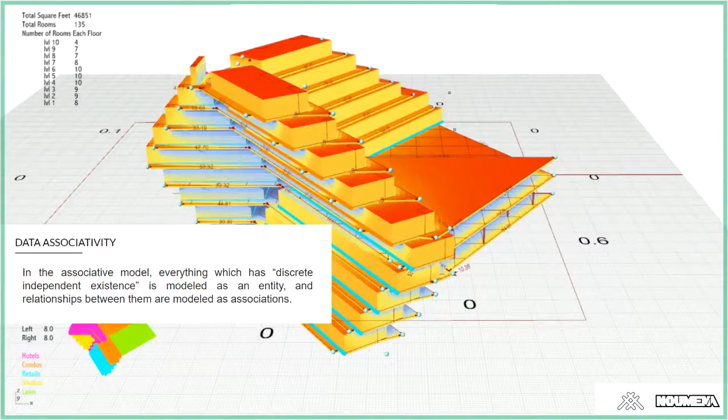Computational design, for what it represents, maybe integrates even a step more. So which are the parameters that are really affecting the design protocol? For sure, we are talking about parameters, as Anastasia said before, parametric design. One thing is parametric design, another thing is computational design - this is a small difference. Parametric design is the iteration of forms that are defined by a series of parameters, numbers that control their shape.

Computational design is a process that is built on top of parametric design, but where the intelligence and the complexity is established by a series of external forces that are integrating a higher sense of logic in the definition of a new aesthetic. In human sense, this means we are starting to design with external input. They are not only directly affecting design itself, but are related to the design implication - for instance environmental solution, structural analysis, etc. All these material characteristics, all these parameters become design parameters.

Thanks to the data associativity, so the capacity to associate those inputs into a series of information that affect forms and geometries. But how can we inform these geometries, this aesthetic? Which are the protocols, the different criteria that we introduce in order to establish a workflow of computational design?

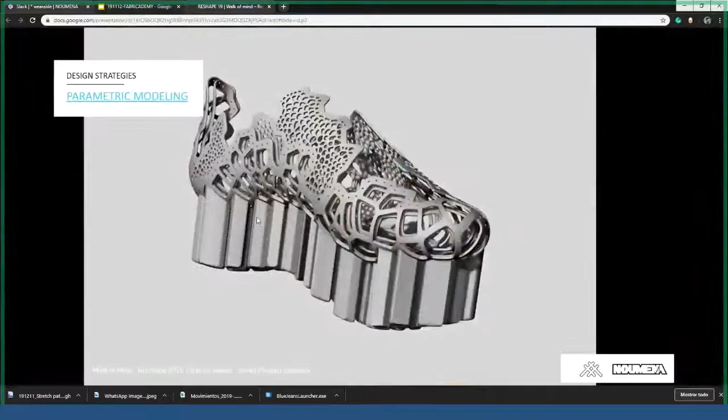Another different approach that we can find in computational design actually represents a different negotiation between the designer and the machine. In this case, we enter a protocol where it's not really possible to define the characteristics of the output, and we establish with the machine a co-creation process that relies on the participation of both agencies - the human one and the machinic one.

So if you talk about loops and recursivity, this also is a definition. This presentation is shared with all of you, if I am not wrong. You will see this is a very typical - I guess the video is not working here, we will fix it - but this is a typical process where the aesthetic output is actually the result of a repetition of a series of actions over time through a number of iterations, and these iterations are actually modifying and transforming forms and geometry.

So here you can talk about fractals and all the iterative design that is connected to loops, cellular automata, L-systems, etc. It's completely a different world.

Then also talking about emergent design, we have the huge sector of agent-based design. In this case, we are talking about the definition not only of actions, but actually the definition of behaviors. So what we are programming are actually agents that have their own intelligence, their own sensibility between their movement and the environment, and are starting to move freely in this space, but what the designer is producing is the set of rules that they need to follow for every movement.

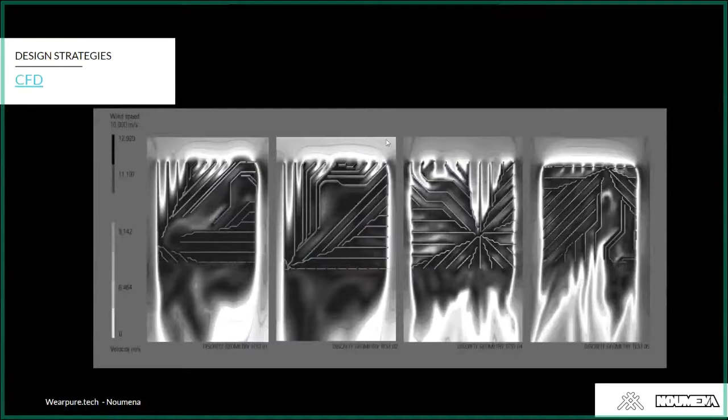Okay, so grazie. So what I was mentioning here with computational fluid dynamics is what is happening in the car industry to simulate wind. Can you hear me, Teshi?

I see you. Okay, all good. Audio is perfect here. Okay, super, I'm happy about it. So okay, I will show you later this project.

Okay, I'm sharing the screen, but I don't want... Okay, I can move it around. So I will show you later what this is related to.

We will jump into the specific process. But it's exactly what in the car industry you do with the wind tunnel. They are simulating the movement of air and understanding which is the best, most performative shape that can produce the faster car. And we will see how we can introduce something like this also in the making of new textile applications.

Then talking about textiles, there is also the possibility to simulate textile behavior. In previous Fabricademy classes we've also been through these protocols that you might be a little bit more familiar with. Commercial softwares like Clo3D, for instance, are integrating simulation of clothes and fabrics into digital environments.

But in this case, it's very similar and connected to the integration of physical behavior into the digital environment. This is also what we are implementing, or we implemented, I will show you later, into the production of new aesthetic solutions. We will jump into it and I will show you how.

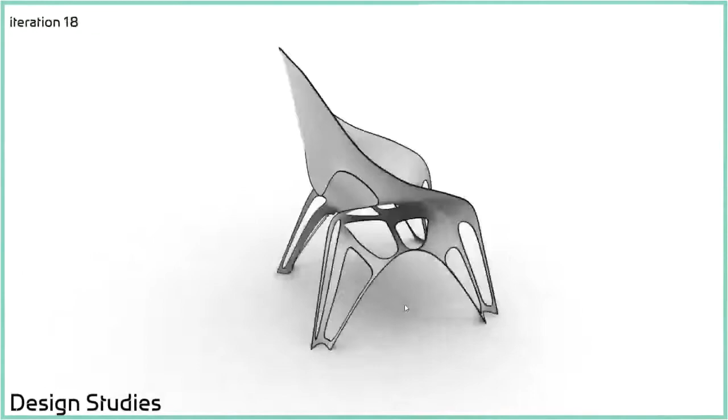In this case you can see the simulation of the chair itself, the smooth form of this chair brought into a higher level of tessellation, and then what is run on top of this structural geometry is a mesh topology optimization.

So according to the weight of this person, you consider weight loads, then support systems, and you start to understand how the material should appear or disappear, should be integrated most in some specific areas in order to be more structurally performative.

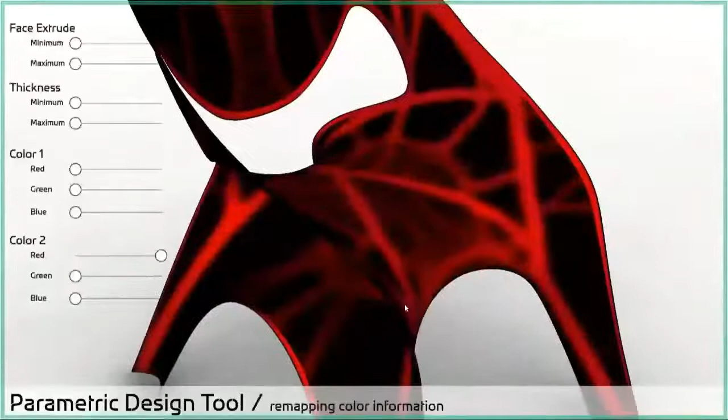But the interesting part is that all these instructions and protocols are associated, from the digital realm, to the definition of G-codes, so machining protocol for fabrication. And this is also something that is not new at all.

In the Master of Robotics and Advanced Construction, we also did a second iteration on top of this one, and I invite you also to have a look at the final result.

It's still very valuable as research, even though we're talking about something from 2016. In computational design, things become outdated very quickly.

Talking about what I said before, these different protocols or negotiations between machine and designers. There's the big realm of machine learning, convolutional neural networks, and the definition of new integration of machine decisions into the design realm.

Grasshopper, in 2011 if I'm not wrong, introduced new systems for evolutionary solvers. This was really the beginning of protocols for machine learning based on the definition of goals and parameters, genomes that could support the implementation of the best, most performative solution according to a series of characteristics that the designer was setting up.

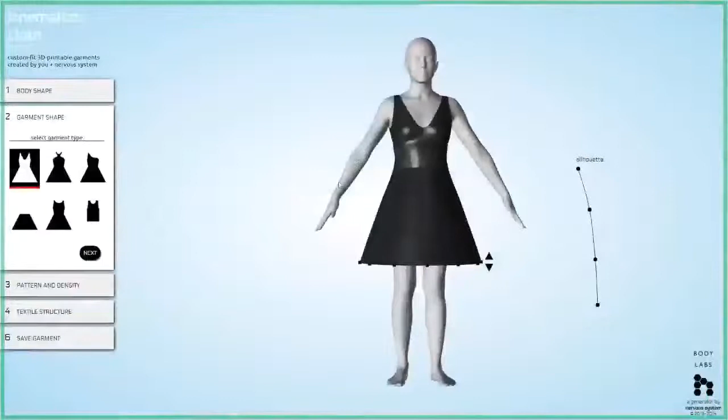So: control geometry, forms, tessellations, and associated to this capacity to produce variety also the possibility to customize the shape, customize also the connection between body and geometries, and control at the same time all the fabrication protocol.

This is a small exercise that we will also do in our class today—an iterative tessellation that is controlled by just the definition of these different colors. This iterative tessellation, at the end, is also controlling the definition of this new skin that they are producing, a skin that is of course 3D printed, and this is the final output.

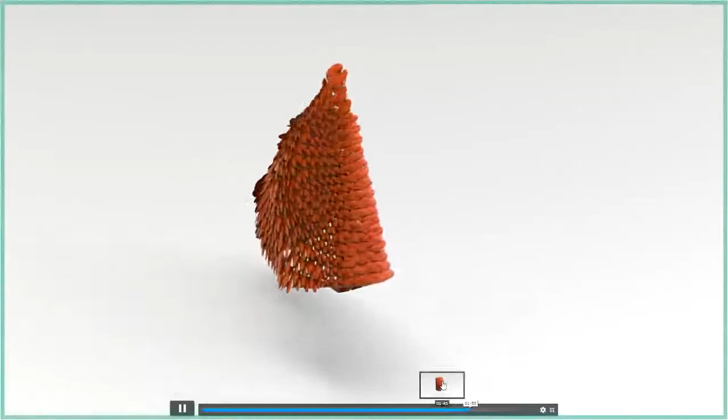But of course, nothing is so simple. In order to fabricate this piece, you need to combine the different characteristics that even the machine has. So the interesting part in terms of computation that nervous system did here was to unfold the dress and understand how the dress could be folded in the minimal amount of space to enter the machine.

As you can see here, the printing was rolled in order to be implemented inside, fit into the machine space, and then fabricated. So an interesting connection between variety algorithms that are controlling aesthetics, definition of fabrication protocol, and also controlling this fabrication protocol according to the machine characteristics—which is great.

And then jumping a little bit to this project—let's go on. Of course computational design is implemented as well in interior design as another field, and here we are introducing a lot of different aesthetics, some of the furniture that we introduce, or also implementing different paradigms for artistic installations.

For instance, here we have a code that has been implemented a lot also in computational design and in fashion design as well, you will see it. For instance, me and Cecilia have been working on a similar code for the definition of Coralia in 2017, a dress that was mimicking a coral reef, associated with this computational code.

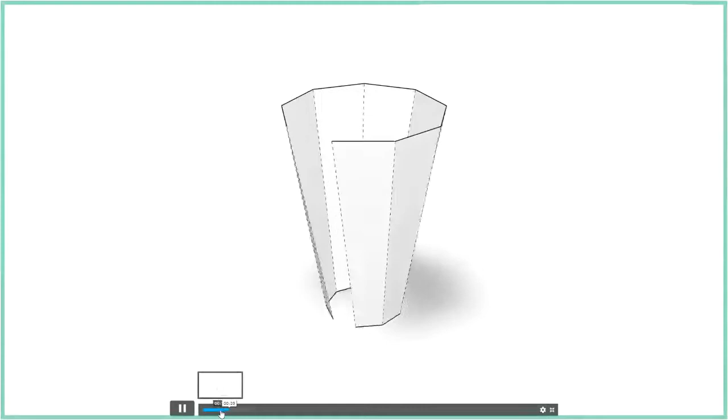Also, of course, instructions for 3D printing—this is a project between Zaha Hadid and AI Build.

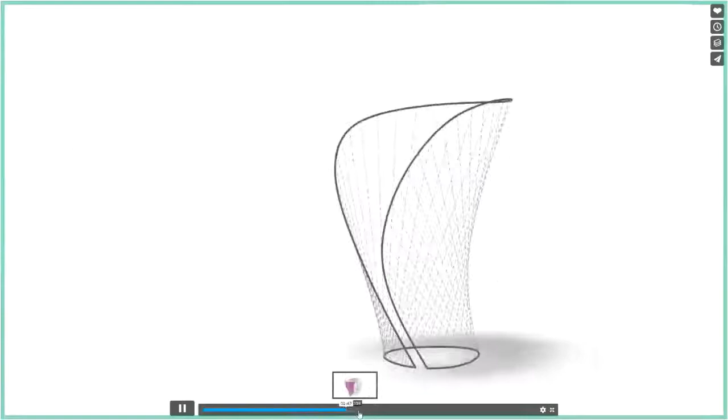The interesting part here is also the integration, as usual, of machining protocol and design iterations. So this is the shape, defined by a specific fabrication process called ruled geometries. All these strips are actually planar systems, then defined by a machine cutting according to these planes, like here, by a 6-axis robot.

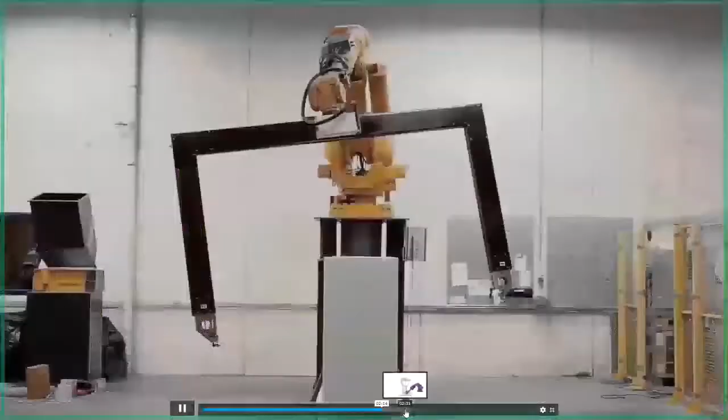It's cutting a series of cubes and then 3D printing on top of the final geometry. Even here you have a lot of creativity connecting multiple processes of fabrication, multi-scalar processes that are all the time affecting the iteration of your aesthetics. This is a system we implemented in the Global Summer School 2016.

I bought a lot of foam, and IAAC was exploding with foam, and we built a series of installations with the very same system. The interesting part is that on top of this foam, using 6 axes, the machine was also 3D printing. So we're not only using 3D printing as a planar system changing because of height, but also using all the 6-axis possibilities, all the rotation possibilities the machine introduces. A very interesting protocol that introduces a lot of complexity and possibilities for us as designers to interact with.

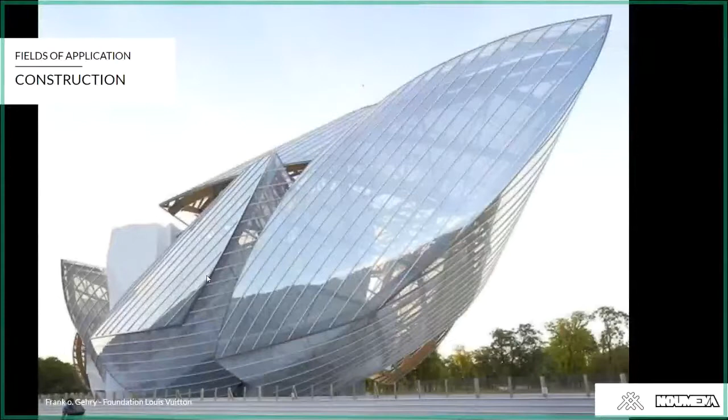And then, of course, I'm jumping ahead to construction, but all this computational design actually starts here. In 1992, in Barcelona, the architect Frank Gehry got commissioned to construct the fish for the Olympics of Barcelona in 1992. I hope nothing comes up if I search for Gehry fish, Barcelona.

Yeah, here we go. So this is the first implementation of computational design in construction. It's interesting because it's the very first time a series of geometries and forms are translated into machinic protocols of fabrication for architecture.

What you see, or probably don't see so much, is a series of strips. There's a discretization of all these different strips into custom geometries, completely different one from the other. It was completely impossible to control such a complex double-curvature shape using normal software.

Frank Gehry, the same architect of the Bilbao Guggenheim, the Disney opera in LA, etc., introduced a new software built on top of CATIA. CATIA was a software used by the car industry. He built on top of it a solution producing all the precise pieces, completely different one from the other, to build in 3 months the very first output with computational design. And from there, it's just history.

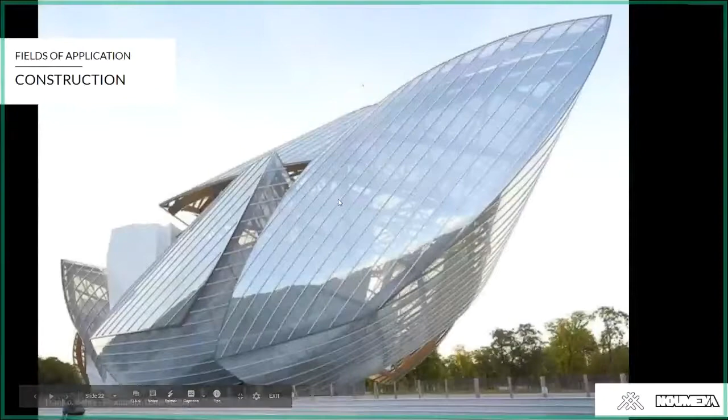So we started with CATIA, and then Processing, Grasshopper, now BIM, building information modeling, etc. All the stuff you see here is tackling how computational design is implemented in different sectors. But let's see which protocols we can control with computational design. I'll be very fast here.

I don't want to spend time talking about 3D printing. With computational design, of course, we can create custom G-codes. We don't have to rely on external software to create slicing solutions for our geometries. We can produce all the items necessary for molds, and of course control laser cutting, milling, etc.

Now this is a new part I added with Laura for this class, and I'd like to show you how we use computational design in this office, through a link to Vimeo with Noumena. As I told you before, we're an office, a tech company implementing computational design in the definition of new aesthetics and language.

So let me see, where is it? The style link. Yeah.

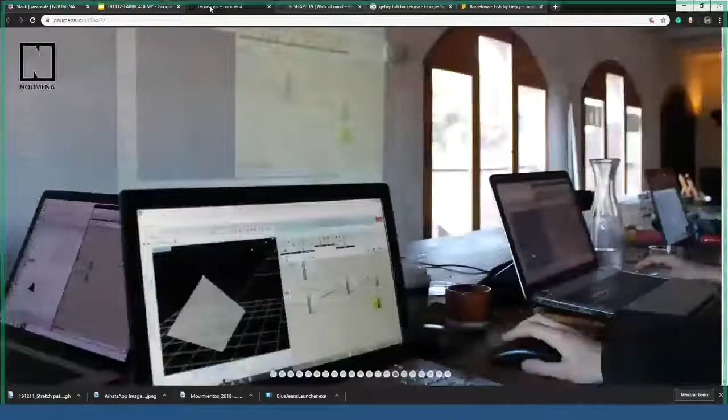Okay, so I want to show you quickly this showreel that we did. I will not show you the video from the presentation, but I will jump into the description of some applications we did with computational design, together with the Institute of European Design of Barcelona this year.

If you consider why to work with forces and how we can translate the capacity of computation into external output, in this case we collaborated with an architect called Edouard Cabey in the definition of a mechanical geometry that can simulate how forces can manipulate textiles.

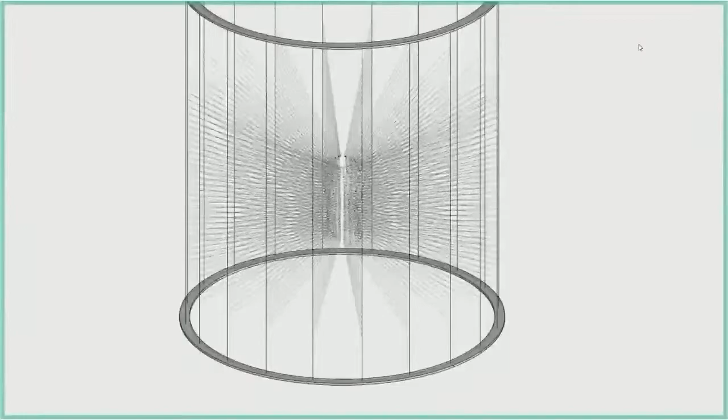So we built a machine, a crazy machine, built around a big frame around a dress. We created a grid connecting every single part of this dress to a specific point in a polar array coordinate system connected to this machine. The central part of this machine was the dress itself, and all these points are the ones we were pulling with strings.

So we were applying an external force to the textile, and at the same time translating this deformation into the computational space. This is a machine to physically test the implication of forces in the definition of aesthetics, and I want to show you the protocol behind simulating how these systems work. Okay, look, this is a little video.

So we are starting from a 2D pattern that is not complex at all. We are creating the relaxation of this mesh around the body, an invisible body, of course. Then we are digitally simulating the exact same phenomena of applying forces that Edouard was developing with his machine. Afterwards, we associate this deformation with a protocol of fabrication, discretizing or subdividing this geometry into a series of strips that are then sent to a laser cutting machine to be built and assembled.

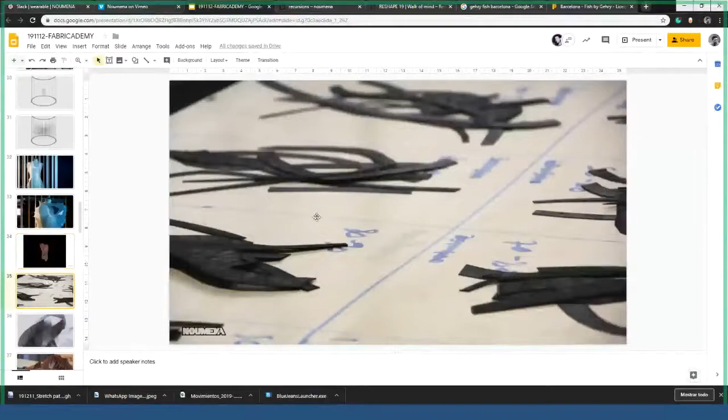So this is one protocol combining what I expect you to do in one week. I'm joking - this needs a little bit more. But this is what we brought to all these strips that you see here, which were strictly connected to the bridge we were making from the physical environment to the digital, and then back to the physical thanks to this protocol of fabrication. Those are some other outputs that we got.

But we also started to integrate manual craft into this protocol of fabrication, implementing threads. We started to explore how to combine the strips back together. This was actually my favorite solution, but it was a bit hardcore. Maybe we could use pins, but it depends also on the fashion designer - here the guy wanted to use this approach.

Then we had another collaboration, also with the European Institute of Design, for the Bridal Fashion Week. Here we collaborated with another department implementing solutions for wedding dresses. In this case we introduced a different material - we started to work with ceramics, creating a skin with materials that are not only plastic but also natural, developing an aesthetic that's more interesting because it combines different materials and protocols. I don't love the output, but it was an interesting first stage combining external collaboration with another sense of craft integrated into this new aesthetic.

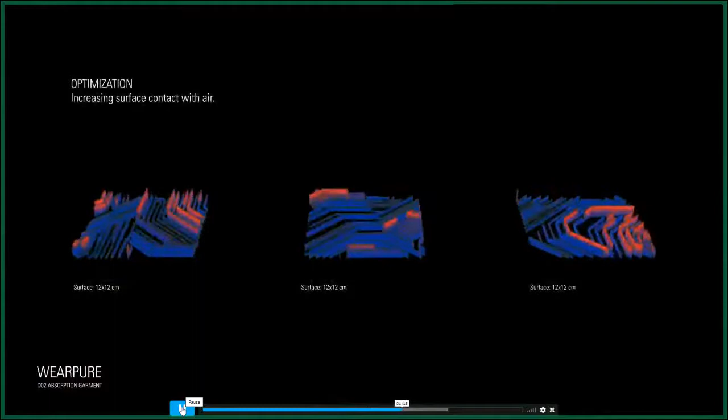We implemented computational fluid dynamics to simulate the efficiency of the skin, and we played with the height of this wall in order to increase the absorption and the connection between air and CO2 absorption.

After this, we worked on the translation of this mineral into a polymer for 3D printing. We started to implement as well the machines of our partners at WASP in the definition of the new garment, and we produced some first outputs.

Together with Cecilia and PrimeLab, we've been presenting this in the Dutch Design Week, in the Fashion Week in Milan, in Barcelona at Reshape, and at the Caixa Forum in January or February, I don't remember.

So this is a first output, and together with Laura, we are now defining new patterns that can also integrate novel aesthetics in the definition of textile applications. Laura is trying to mimic and optimize the characteristics of these forms and the fabrication protocol using Grasshopper. You will see, because later she prepared a script that will guide you through this system, working not only with filament but also with pellet.

In terms of application, this is how we translated the curvature of the body into different landscapes, decoding this information into spatial form using vector fields—different forces that were producing all these different corridors that you can see on the bottom part.

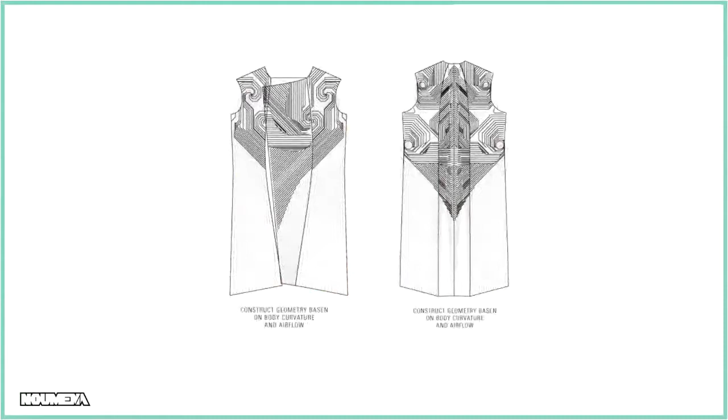We translated this path as well to respect the curvature of the body, understanding how the material was bending according to the filament implemented on top of it. We fabricated it, and those are some high quality images that we placed here.

This course is based on Grasshopper. I can say by experience that by the end of this week you will ask why we are not using Blender, why we are not using Clo 3D, etc. There is no specific reason behind it, but we like to work with Grasshopper because—although it's not an open source tool, unlike Blender, which you're welcome to use for computational design—the interesting part of Grasshopper is that it's a reliable ecosystem with more than 10 years of existence.

Many different designers, developers, and engineers have built on top of the existing infrastructure and developed a series of interesting plugins that convert Grasshopper into a powerful instrument for design. So I will guide you through the basics of Grasshopper.

I will not do this because Eugenio will do it tomorrow. What I will probably do more today is show you how we can translate some quite famous garments into a protocol that respects the computational logic I want to introduce to you today.

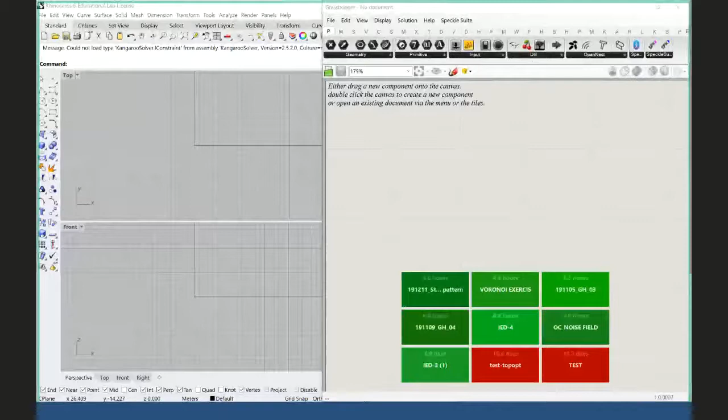Do you see the Rhino Grasshopper open on my screen? Not yet. What do you see? Blue screen. Okay, wait, I will share it now. Can you see now my screen? What do you see? Ciao Angela. Hi, hello, well the rhino with the grasshopper besides. You can see also Grasshopper, right? Yes, we can, I just drew a circle. You can see? No. No, okay, so you probably see the other one. No circle, but we see the rest. Ok, va bene, va bene.

It's good that I don't do the introduction to Grasshopper, right? Yes. What did you say? That's good, I'll skip the introduction to Grasshopper. I don't think it's necessary, we can find it in many other places. Maybe since we have little time, we will do this tomorrow too. Yes, let's go into the subject.

So everyone, open Rhino and Grasshopper. If you have it open, give me a moment to open my definition. Now we have a blue screen again, you don't see my screen. Give me one moment, I want to download one thing. What you can do is when you select share screen, press on the upper part which just starts sharing your screen without selecting which screen you want to share. Okay, I want to share the second screen. Whatever, okay, now I'm sharing my screen, can you see? Exactly. Super, very good. Okay, give me one moment, I want to find my script.

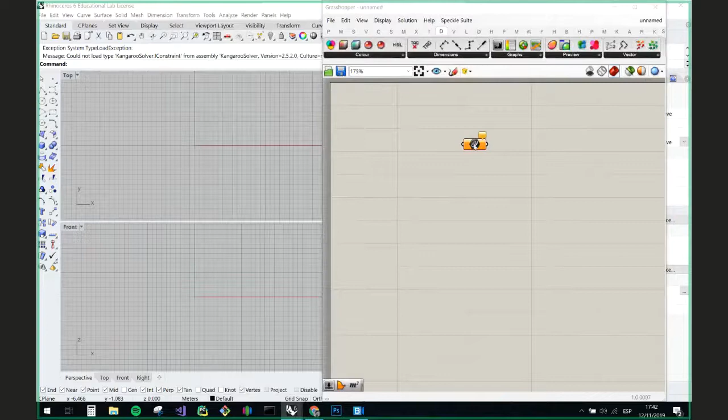That's a quick introduction to Grasshopper. I would like to start with one exercise that is very simple. Which is the end goal of this exercise? Is to...

Create a first field of forces. Remember the example of Behnaz Farahi, we will try to reach it in a moment with the script. What I want to do is achieve this, let me first copy the script here. I will show you the result, and then we will copy one by one component after the other. We will replicate this process.

Now I don't know how much I need to run, but Anastasia will stop me with Cecilia if I am going over time. So, let's see here what happens.

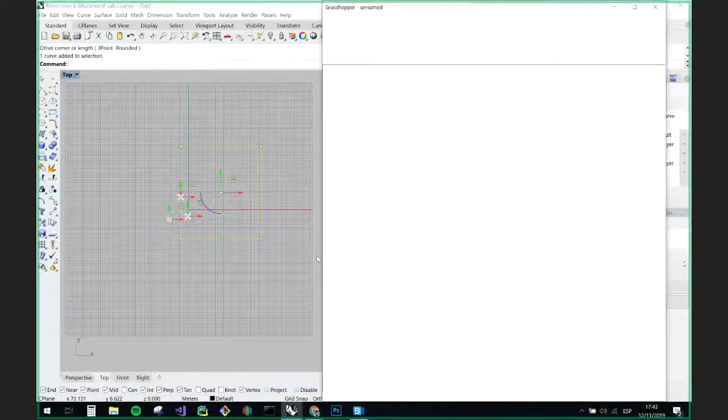So let's say this is what I want to show you guys. I want to create a pattern that will allow us to understand how to control these forms using vector fields. This is not complex. As you can see, this is the script, how it works. And we will now replicate this script one component after the other. So let's turn off all the script.

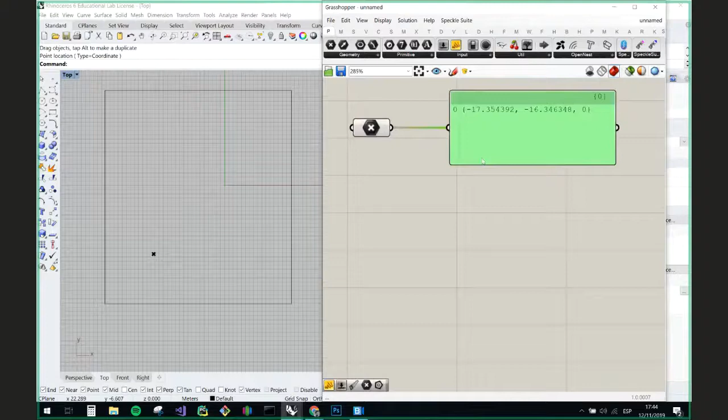I will start in vectors, in params, geometry, and points. This is a component, and it's orange for one specific reason: because it doesn't have any information embedded. So I'll right-click here, set one point, and go back to the Rhino canvas. Now you will see this component is gray, which means it's storing information. If I use a panel here, you will see I can read the information inside. Since it's a point, remember a point is defined by x, y, and z.

Okay, so these are three values that are defining coordinates. Let's do it 3 times. We will actually use 3 different forces that we can convert from the vector field.

So we have one point here. I will place another point here, and another point here. I'm doing that by just clicking on the component, right click, set one point, and then clicking on Rhino.

Good, so I have 3 different coordinates, or 3 different points, and let's start to associate forces to these points. I will go to vector fields, and I will use 2 kinds of forces: positive charge and negative charge. So how this works in vector fields, we have a first set of components. They are defining charges, so they are defining forces: positive forces of attraction, repulsion, spinning forces, vector forces.

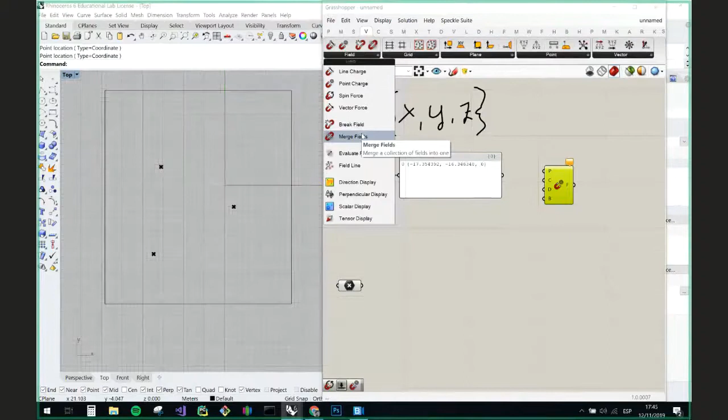Then we are creating a field that can combine all these forces together, and this is something that we will also integrate in a moment. Afterwards, after we create this field, we can visualize it, so we can see how these forces look like with a pattern, and we can also display, so map these forces in a specific plane. So to recap: these are the creation of forces, here you convert all these forces into a field, visualize this field, and map these fields over a geometry.

So this is my starting force. I decided before that I want to have, let's say, a negative charge. So let me set a number slider. This is called a slider. Introducing grasshopper in an hour and a half is not super easy, but this is a slider.

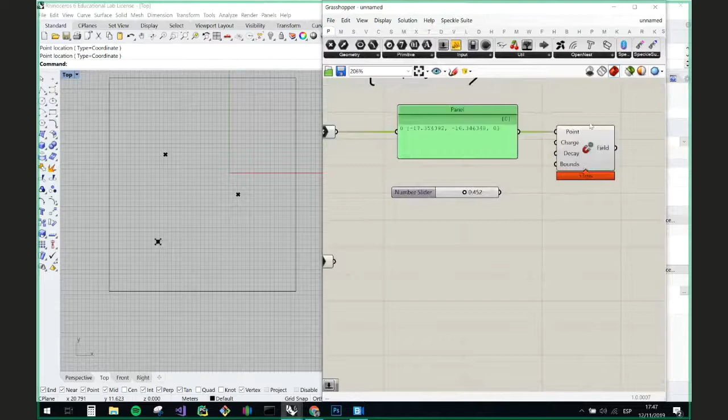A slider is creating one output. Grasshopper works thanks to input and output. You don't have to remember what every single component does, forget about it. Remember that you need to do one thing that is very rare in this society, which is read the input by just moving your mouse over it.

So here we are asking which are the points. Here is asking you for charges. Here is asking you for the decay. We will see what it means, and the boundary, that is an optional condition we don't need. And from the input, this code is giving you an output. So input and output for every grasshopper component, and they work like spaghetti, connecting these different cables from one output to the next input.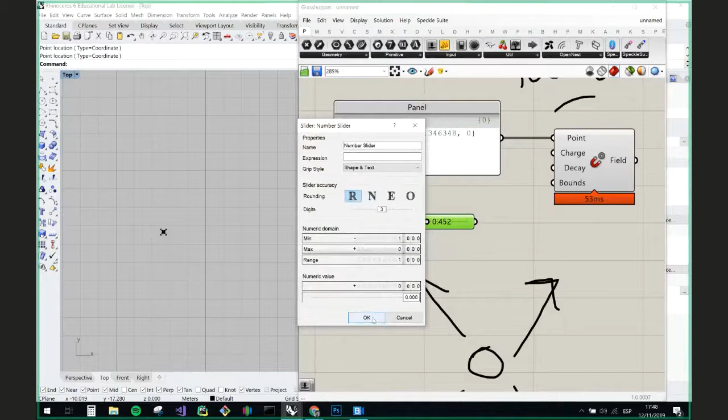So a charge can be positive or negative. It's not very visible here, but this point at the moment has these 4 arrows, because by default, that's why this component is gray, by default this charge is positive, equal to 1. If we want to make it negative, then we double click on top of this slider, we set the slider as a floating value that goes from a domain that is equal to -1 to 0. And here we can control values that go from -1 to 0.

So this is the negative charge. The moment the charge is negative, our point will have this kind of line arrows, because it means this point is attracting all the other points around it. It's like a magnet, so it has a negative charge. If it's positive, it's like something like this. And in fact, this is the negative charge. Let's draw now the positive charge here.

So I will go to vector, fields, point charge. Here we go, and I will connect my charge underneath. To copy this component, you just do it as you do in Illustrator: you press Alt and then left click of your mouse, you connect here. In this case, I modify my domain, and I will say a domain that goes from 0 to 1. So here we go, I have a positive charge now here as well.

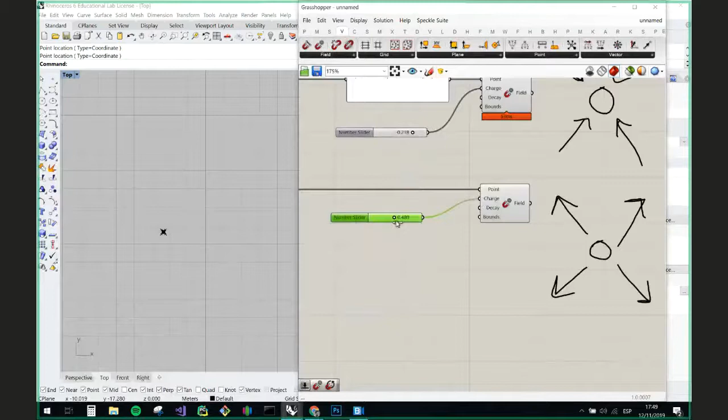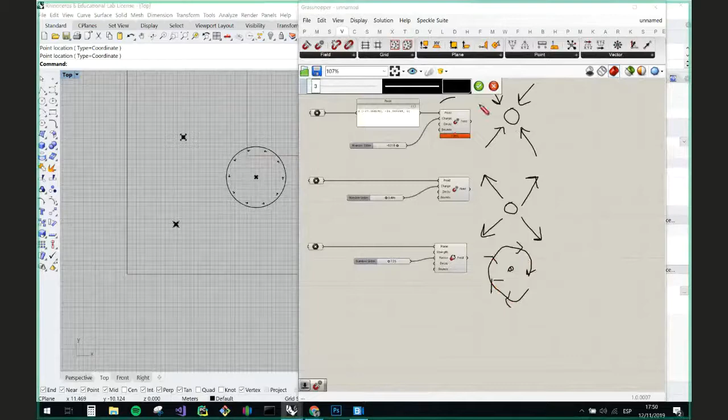Here we go, okay, and I also want to control the decay. We will see later what it is, this decay. So just to recap, I have a force of attraction, a force of repulsion, and then I have a force of rotation, a spinning force, that allows all our points to rotate around it. 3 different forces. I'm now erasing this thing here. Now I'm merging all these fields together, so I will go to vector, field, and merge fields.

I will press shift. When I press shift on the output, you will see there is a plus here, which means I can connect multiple outputs together. In this case, I'm creating a field. Now all these forces are combined together. That is perfect. But these forces are not affecting anything, since there isn't a single geometry they are related to.

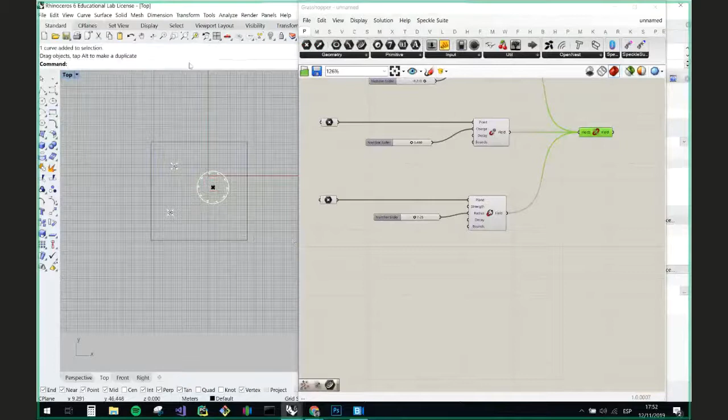So let's create a rectangle, as I did before, but I'll do it again. I'll go in Rhino, rectangle, corner to corner, and press shift because I want this rectangle to actually be square. Here we go, I'll place it here. I'll turn off the grid so it doesn't bother the visualization. Show grid off. Here we go.

And I will go to Param, Geometry and Curves. Right click, set one curve. Here we go, this is my curve. And I will populate this curve by converting the curve itself into a surface.

So I will go to Surface, Freeform, Boundary Surface. Remember that curves are here, I can import geometry from Rhino to Grasshopper from here. Param, geometries, I need a curve. So I call this curve, place it here, right click, and now I have it in my Grasshopper canvas.

Now I want to create a series of points inside. So in Vector, there's in Grid, this component called Populate Geometry. If I just connect my curve to the Populate Geometry, what happens? That creates 100 points randomly on top of this geometry. But I don't have them inside, I want them to be inside of it.

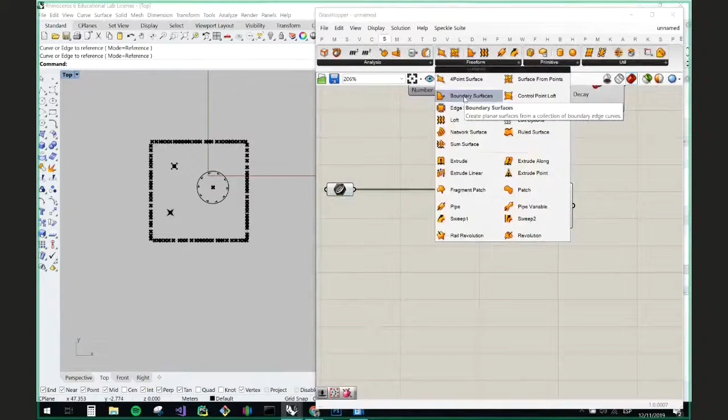So for this reason, I am converting this rectangle into a boundary surface. I'll go to Surface, Freeform, Boundary Surface, which creates a planar surface from a collection of boundary edge curves. I'm connecting this one here. You can see now I have a surface there. I'm connecting my surface to the geometry, and now I have 100 points inside of this surface.

I can hide the geometry in Rhino. I can even control the number of points. I can go to Params, Input, Number Slider, double click in the integer, and type 150, 160, or whatever, and you can see I can control the number of points that appear here.

Is that okay? I hope so. So I will turn off the preview. I can turn it back on by right clicking here, or turn off the preview. So it's still active, but I'm just switching off the preview of it.

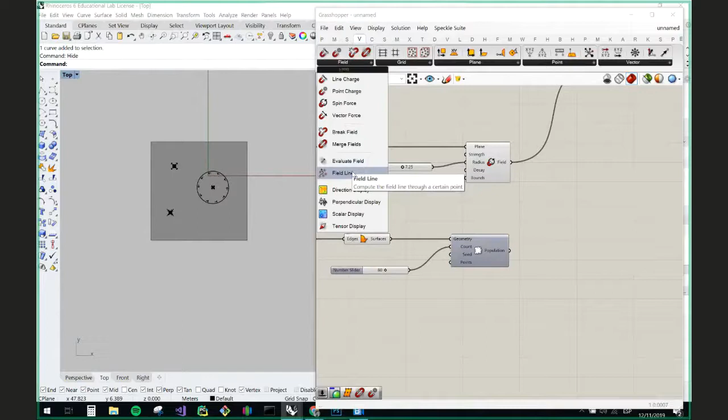Now I will go back to vector fields and use the Evaluate Field and Field Lines components. I want to show you how these vector fields look like. I'll place it here. It's asking for a field to evaluate - this is my field. Then point, this is the point to start from, so it wants to understand which points are affected by this field, and I'll say these are the points affected by these fields. Then I will see in a moment how to play with the steps.

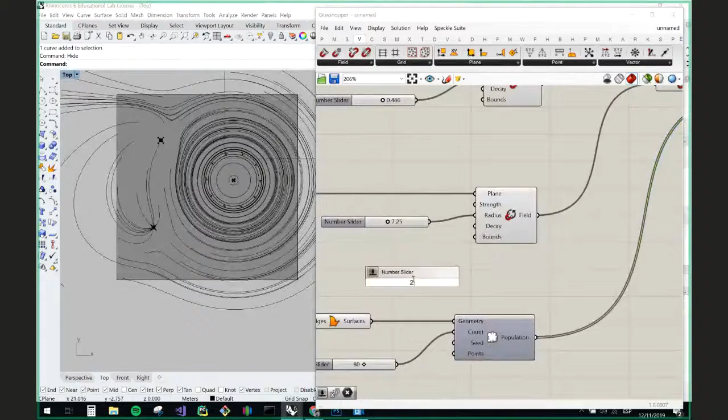At the moment, it's possible to see there is a very strong impact with this spinning force, and this is why I can play with the decay. At the moment the decay is 2. I can put this value from 0 to something, lower it or increase it so the decay is faster - the effect of this force lowers down faster than expected, you see. I can reduce it a lot, dramatically, and of course the moment I reduce it, other forces start to emerge.

So I will turn off this one, and you will see that at the moment I have a spinning force that is quite high in terms of decay. Let's play with the others - if I put a decay equal to 0.15, for instance, here, wow, this is super strong now. It starts to reduce, etc.

Same logic as before, but it's a parametric design, you see. It can be so thin that it just affects what is close to it. And with this value, you can play to control all the different outputs, also from the other forces.

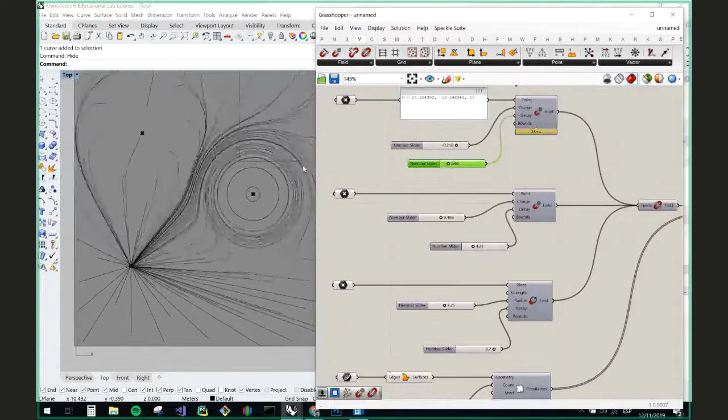Okay. And this happens now, this code. Yeah, someone is going to interact.

The surface component is called the boundary surface. I'm going to activate the HoloLens... this component is called Bifocals, and it draws the name on top of every single component we use with it. So this is the boundary surface, populate geometry, and field line. Boundary surface is found in Surface, Freeform, Boundary Surface.

Okay, yes, thanks. Roberto, is it you? I didn't see the video. Yes, it's me. I recognize the voice. Okay, cool, ciao. All good there? Yeah, I hope so. I don't hear your audio, but I guess you are good.

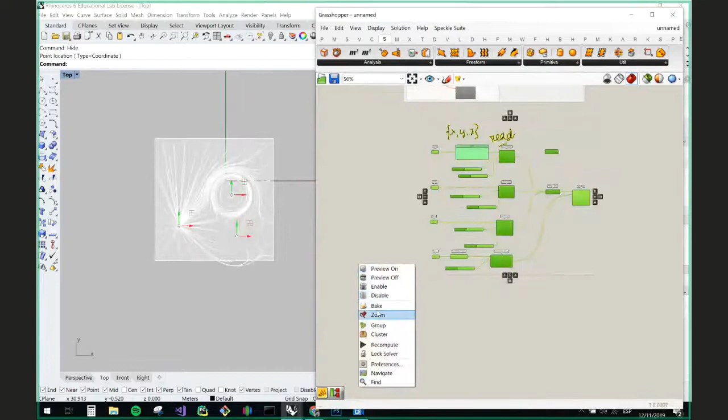So this is a first example I want to make to introduce the logic that Behnaz Farahi is using in her dress. Okay, so let's have a look.

Sorry Aldo, I have a question about the forces you produce. They're not lines, let's say, it's just something you can later translate into geometry. If you want to manufacture it, is it just forces, not really something concrete? No, these are lines.

If you want, I can show you. These are lines, look here. If you go to Panel and place a panel here, a panel is always reading what is happening inside. There are curves, polyline curves.

Okay, thank you, that was not clear to me. I was thinking it was just forces. But yeah, thank you. No, these forces are lines, producing also lines that you can use, but there are interesting visualizations you can make as well.

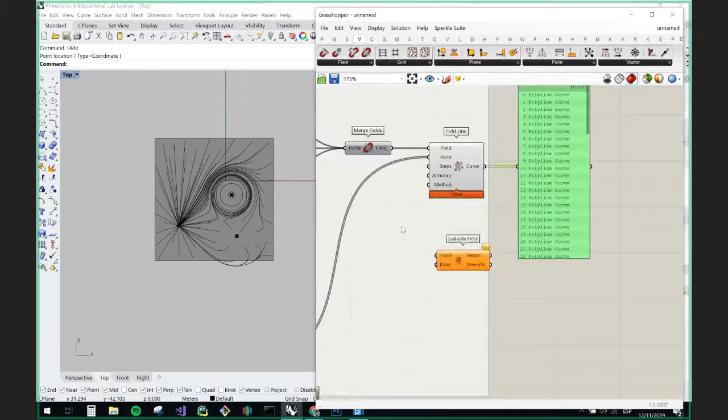If you want to evaluate this field, there is one thing they are producing - there are also the values of the vector, which is more advanced. If you play with the evaluate field, this gives you a different output, which is the intensity of the vector. So here you have the field, and here all the different points, and in this case what you visualize are the values in terms of vectors - the forces pushing every point in space.

If we have time for another script, I would like to show you how this is connected to another script we shared in the past, which is here. You can understand this one a little better by looking at this code.

Imagine here we have points in space that, every iteration, are pushed away by a field of forces. These forces are moving an object thanks to a vector. When you move an object from one position to another, I'm applying a vector translation. So a vector is like a coordinate defined by x, y, and z, but also defined by a direction and intensity. In this case, the direction is this one, and the intensity is the value of movement.

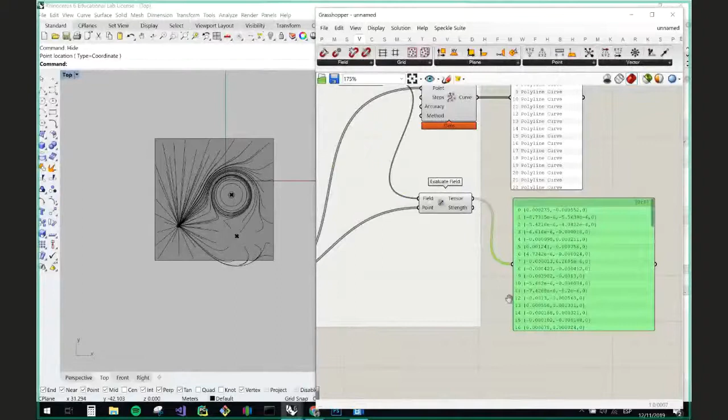We are not seeing what you are trying to explain about the intensity. I don't know if you see my video, but do you see it? No, we are just looking at the numbers. I will explain later what a vector is. I don't know what the concept of later is here. Let's see what we can teach you in the time we have left.

Let me comment the script so I can speed up a little, because in theory the class finishes at 6. I will not go component by component, I will just show you what every script does. Give me a moment.

Okay, let's switch to the example of Behnaz Farahi. The image I showed you before - Behnaz's project is Caress of the Gaze. It's an interesting project working with shape memory alloys and computer vision. It's one of the most famous projects in wearable technology, and I'm sure you'll get more familiar with it. But I'll show you the logic behind it.

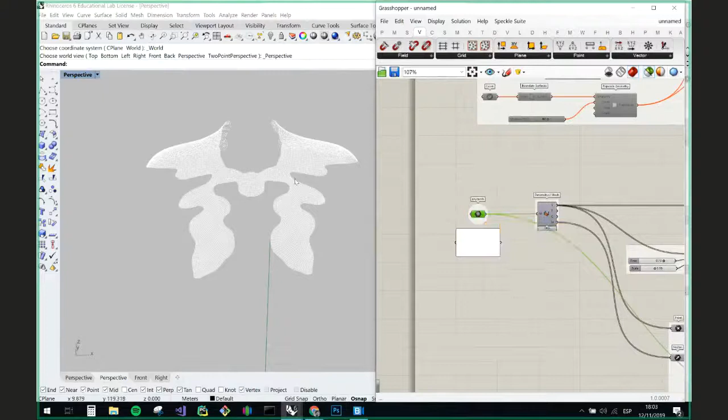Let's consider an approach that is completely three-dimensional. We want to work on a portion of a body - consider this a patch that, with Eugenio, we cut over a shape, designing a form over the body.

But if you look at this geometry, this patch is a mesh. A mesh is defined by vertices, faces, colors, and normals. In a mesh you have a lot of information. It's not only what you see with your eye, but a lot of mathematical information that is embedded in this geometry, allowing us to control and manipulate this shape with a higher degree of complexity.

So what this code is doing is taking this mesh, exploding it, and extracting vertices, faces, colors, and normals. What is the normal of a mesh? If you consider a plane, a normal is always a vector that is perpendicular, 90 degrees, to a plane. This is a normal.

Is that clear, Adriana? Yes. Okay, cool.

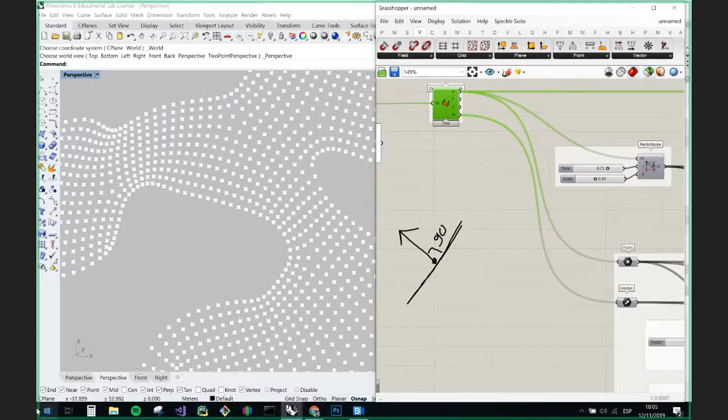So we have this normal, and what I'm doing is playing with this value. It's all numerical values, you will get to it, it's more advanced, you will start little by little. I want to show you the capacity that this tool has to control forms and geometry, because Monse last year was asking me for something related to controlling the orientation of forms in the three-dimensional environment, for the generation of a skin she was working on.

So we have these normals. These normals start from this vector, from this position, and go in a specific direction. If you want to visualize this direction, I will use a vector display. So these are the anchors, and those are all the vectors. You can see that all these points have a normal going outside of the body.

So what we are doing is twisting, modifying the inclination of these normals according to an external pattern, like a field that we are producing. Look at the drawing from Behnaz's. Can you see a sense of rotation here, a twist between the geometries? Can you see that this thing is twisting, right?

So what we are doing is calculating a degree of rotation according to a value that is distributed all along this geometry, like a noise distributed all along the geometry, associated to every single point of this mesh. So we are calculating the rotation here. Look how easy it is, just a couple of components, and from this orientation we are rotating this mesh.

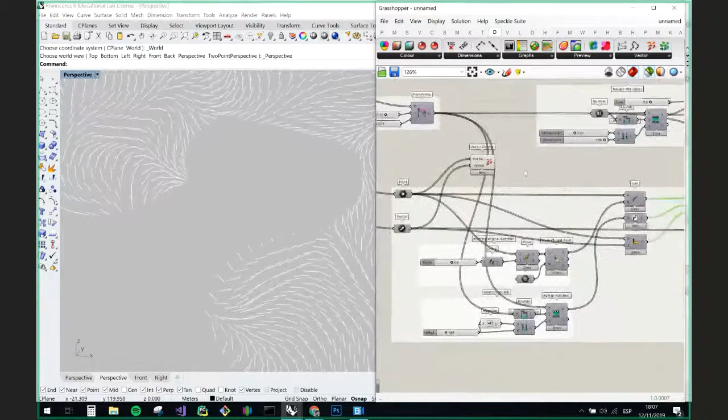How? Because we are implementing a Perlin noise. Perlin noise is a code that was developed in the early days of computer graphics to simulate smoke. If you search for Perlin noise, it's a technique, and this is another beautiful thing about computational design, a lot of techniques coming from different environments. This is a Perlin noise, a simulation of this smoke effect that was implemented at the end of the 80s in the cinema industry to simulate smoke with computer graphics.

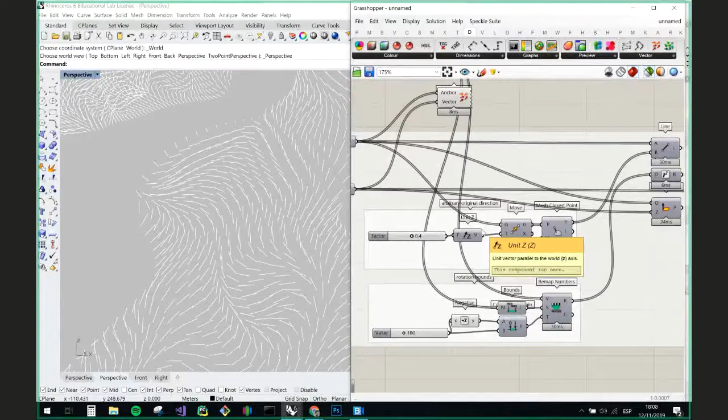So consider we are implementing this pattern on top of this mesh to calculate this rotation. We create a line between every point and its projection in a specific direction, and this line is rotated according to the values of the Perlin noise. These values are also remapped, so we are remapping these values from 0 and 1 into a new system of degrees, from minus 180 to plus 180. So the Perlin noise is the map.

Let's start from the beginning. I have a mesh, I explode this mesh, and now I'm associating one value to every single element of my mesh. I don't know if I'm coloring the mesh here, but so I'm associating one value to every single vertex, according to this pattern of black and white, dark gray, light gray, etc. So I have many values for every point.

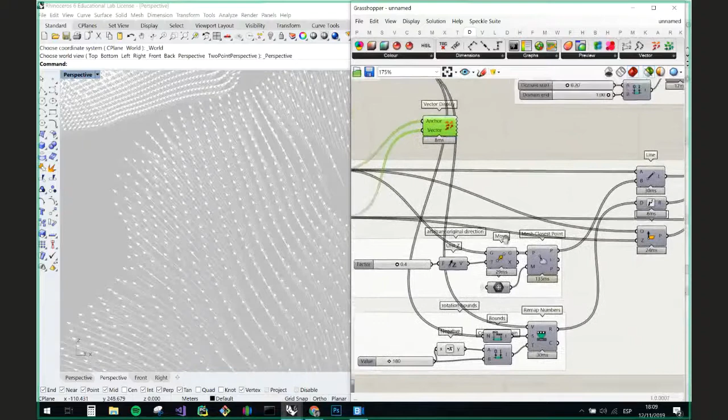Now I have my starting point, the vector, which is this vertical line you saw before. What I want to do is rotate this vector. Don't consider this movement here, it's just a tweak, a trick we use to exaggerate the aesthetic resolution. So what I do is these values of Perlin noise are from -1 to 1.

-1 to 1 is not the domain that I want to use to rotate, to create this rotation. I want to have a rotation in degrees, from 0 to 360 degrees. So I'm remapping this value thanks to this component here. I'm taking all the values from -1 to 1 from the Perlin noise, remapping these values, and creating this rotation. I will share with you this script, so you will see how this effect of movement starts to happen over the skin.

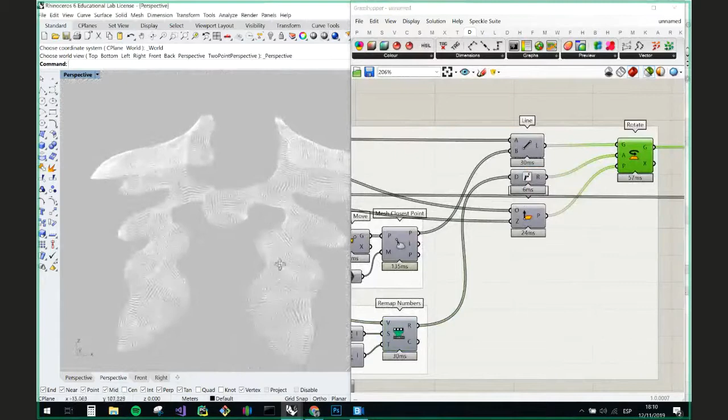Then what I do is just a matter of visualizing, increasing the effect of these lines and coloring them in space. Let me turn this off. This is a more complex exercise, but you can see that with very few components, just applying the Perlin noise, you can implement this effect over this body. I guess this is more complex, but I'm available to discuss about it.

But let's say there is, yes, question. You have a question? No, okay, good.

So this is just a big leap, a big jump between the vector field to this one, but in terms of components, as you can see, not many. We are not using many components.

This is also something good to add. Now I want to do a simple exercise, so you're not scared too much about what it's possible to do in Grasshopper. I want to go back a little bit to the example of the reshape we saw before, this shoe that was awarded in the last exhibition. You can like it or not. We don't pretend that always the best project wins.

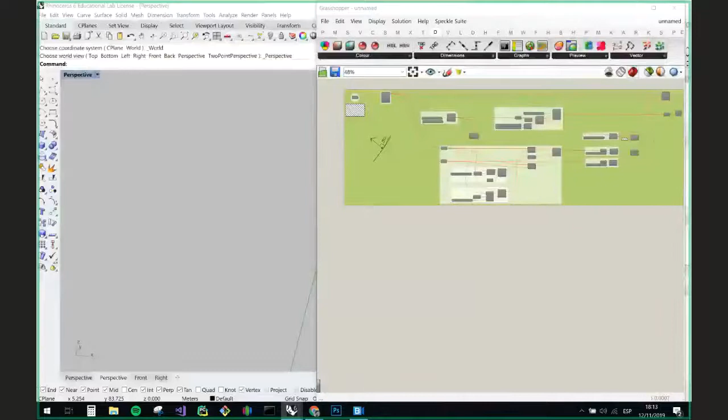It's not something complex, this system, and you'll see it's way more easy than the one I showed you now with the Perlin noise, much more easy. So Laura prepared a pattern to produce this shoe, and I'm going to copy this pattern here on my canvas.

Let me go on top view. So in this case, the easier thing we can do is work 2D. Instead of working immediately in 3D, we want to work 2D. So we want to start with a pattern that can be very similar to the one you are familiar with in your fashioning. I'll go a little bit step by step, because I guess this one could be easier to use but also interesting to do together.

What I will do is tessellate, create all these subdivisions, this grid subdivision on top of it, and then we will use the data structure to control the different materials we want to apply, and also maybe manipulate a little bit the aesthetic and subdivision of this cell. So as I said to Roberto before, I will use again a boundary surface.

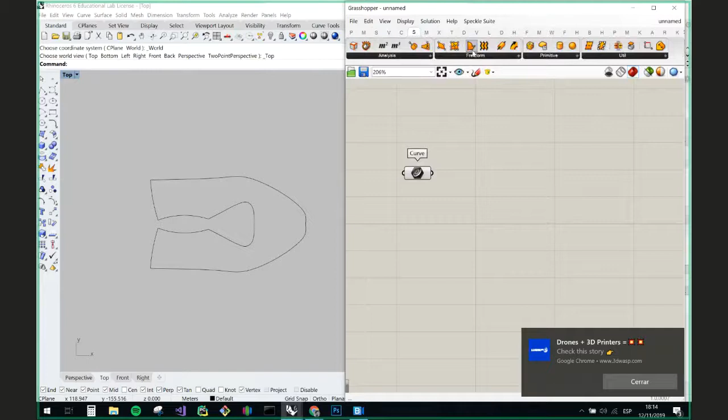So from a curve, I will go to surface, freeform, and transform this curve into a surface. As we did before, I will go to vector, grid, and populate geometry, and create all these different points inside the geometry. Then I want to do something very easy: convert this geometry into a grid that follows the Voronoi logic, which has been abused a lot at the early beginning of computational design.

So we can already see that now every cell in space occupies a specific environment, a specific cluster, a specific portion of this pattern, on top of this pattern. What we want to implement is that these cells are all cut inside the geometry we want to use. For this reason, I will integrate an intersection.

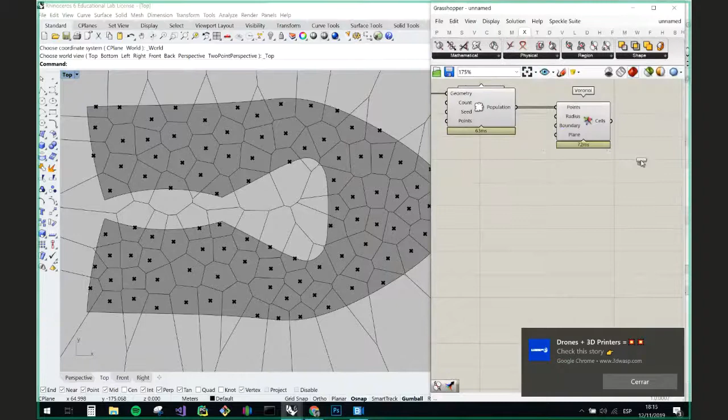So I will intersect this grid of cells with my initial curve, with my initial surface. I'll go to shape, intersection, then shape and region intersection here, and intersect my Voronoi cells with my initial surface. Let's see what we have.

These things you see here are the time of computation that this script needs in order to allow every component to work. This component is taking 6 seconds to work, while this one 72 milliseconds. So be careful because it takes time. Sometimes for some components it takes time to send an output.

Now we'll preview off everything that comes before, and we have our tessellated geometry that I'm pretty sure Cecilia loves on top of the shoes. Now I will go to surface and let me see. Now what I want to do is control a little bit how they are organized in space. There is one thing I want to do first.

With this simple exercise, I will talk a little bit about sets, lists and trees, just a little bit. It will be maybe more clear after tomorrow's class that Eugenia will give you, but I hope it will also be transmitted by the Fab Lab Barcelona.

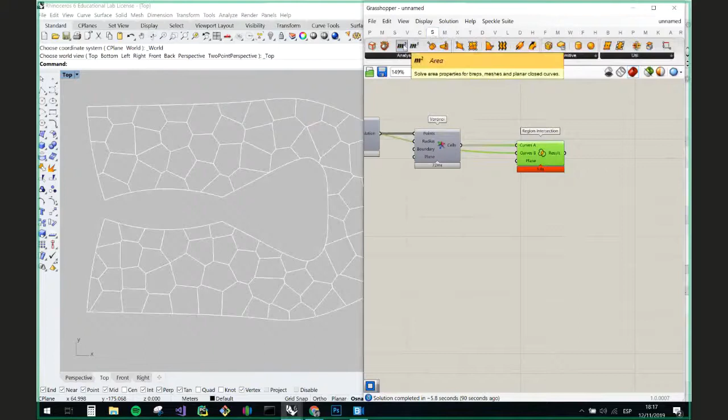So now what we are doing is that now that I have regions, I'm calculating back my centroids. We go to surface analysis, and we'll calculate from these curves my centroids. All these points, like the one that we had before, very similar actually to them.

Now what I want to do is look at the project that was presented for Reshape, by the designer Adara. We need to add the names of the designers here. So what is happening here is that Adara is treating in a different way a portion of the shoe.

So let's do one thing. I will draw a central line here, and according to the distance from this central line, we might apply different materials. That is more or less what I can see here, something similar.

We can see that there is a material here at a certain distance, another material here, and also another material underneath. That, of course, is not part of the one that Laura unrolled in here, it's part of another surface. So what we have is this geometry.

I'm now calculating the distance, so I'm implementing another mathematical action that will support the way that I extrapolate this form. I will go to vector, point, closest geometry, full geometry, pull point. The geometry I'm using is here, so I'll go to params, geometry, and curves.

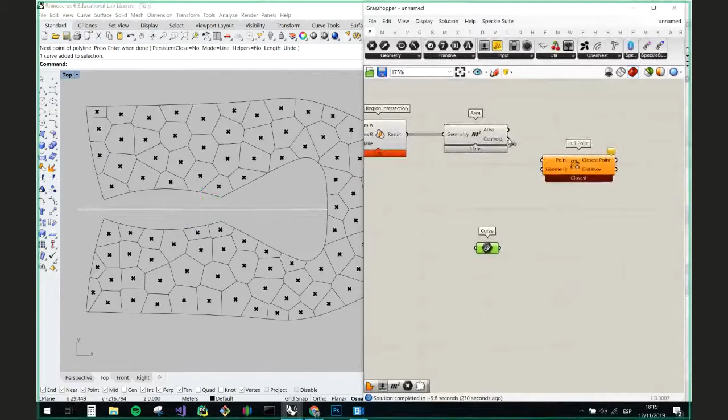I will import this curve into Rhino, so now this curve is in my grasshopper. I will say that those are my centroids and this is my geometry. So what is happening is now I'm projecting all these points on top of this curve, and I'm calculating the distance.

That is perfect. So if you want to visualize it because you are unclear what happened, I'm going to go to set primitive and line, and say that this is my starting point and this is my goal. So this is the movement that I'm making, from here projected to there, you see? This is the projection of all these points on top of one geometry.

As an output, I'm getting the points of projection, are this one, and then the distances. I will play with the distances, okay?

So I will try now to sort all these cells according to the distance from this initial curve. I will go to set, list in list, and sort my list. What is a list? Something that we can see here in panel.

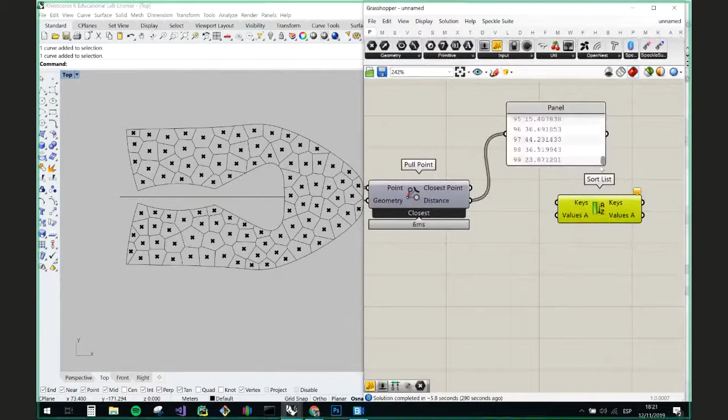Params, input, and panel. A list is this list of values, and we have 100 values from 0 to 99. So for every projection, we have an actual distance. Now what I will do is sort, so I will reorganize my list according to the smaller distance to the higher distance.

So from something that is random at the moment, one point was at 26 centimeters, I don't know, millimeters, another one at 42 millimeters, etc. Now we will organize this list from the shortest distance to the larger distance, so from 4 millimeters to 61.

Nice. And aside from organizing these components, I'm also organizing another thing, which is my cells. So these are my keys, and I'm organizing my cells. Now the first cell will be the one that is closer, and the last cell on my list will be the one that is farther away.

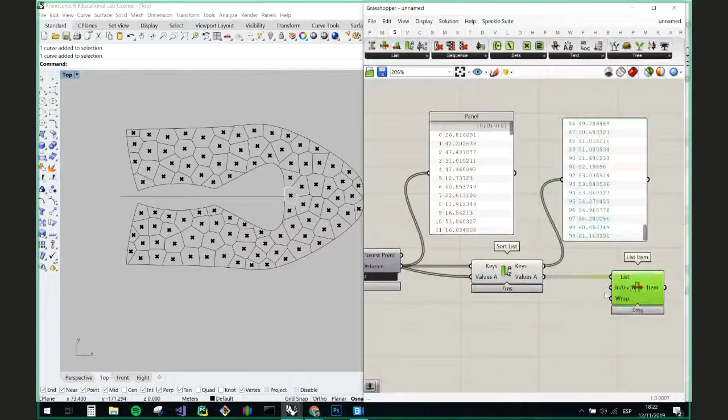If you want to select them, you can go to set list and list item, a component that helps you select one item from your list. The closer one, as you can see, is this one, the one that is touching my curve. And this changes if I place my curve in another position - here we go, we can see that the closer cell becomes another one.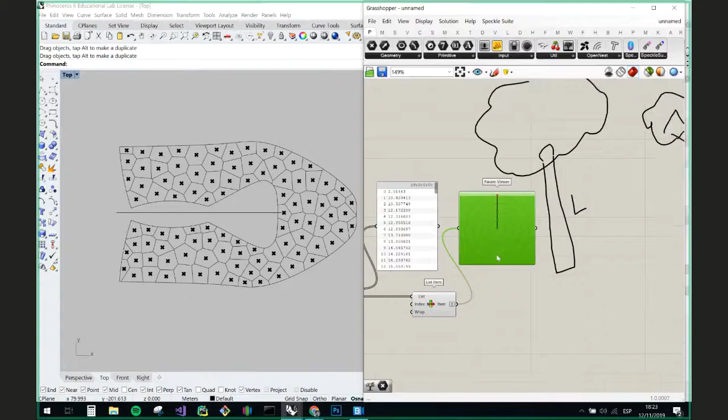I want to cut, or split this list into multiple directions according to the distances. Every distance is creating a domain of values. So I will go to the math domain. I want you to think computationally, in mathematical terms. I will extract the domain boundaries and understand which is the smaller value of my domain, which is 2, and the higher value, which is 58.

I will extract these two parameters individually, so I will deconstruct my domain. Remember that this component tells me that this domain goes from 2 to 58, something like that. I will deconstruct this domain and pick the biggest one, and say, okay, if this is the value of my domain, let's split this value 3 times.

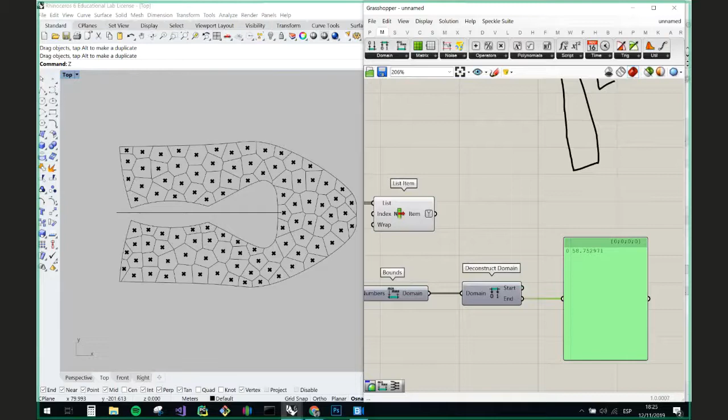I want to create 3 groups, so I will create a division. I will go to math, domain, and division, divide this value 3 times, and we get 19.

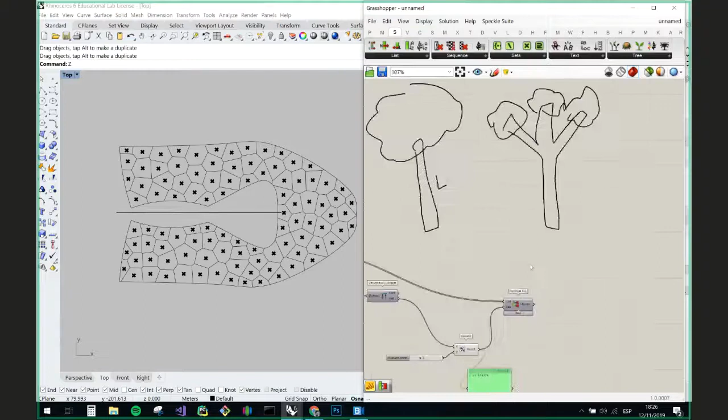So let's see what I have to do now. I will go to set, list, and partition list. I will cut this list according to every 20 items here, using the initial cells as the starting list on my partition list. What we have here is a collection of different chunks. Remember we had 100 items, and now I have 2, 4, 6, 8, 10 — 5 different chunks, 5 different portions of the initial list, 5 different branches that I can treat differently.

If you want to visualize it, you can go to params, params utility, and param viewer, and you can see the structure of this tree. So the same information that before was stored inside one unique list is now stored into a tree structure. We have 5 branches with 20 items each, when before we had 100.

Let's see why I need all this stuff. Because I want to have more control in the way that I manipulate forms, to integrate a data approach to the manipulation of the geometry and the application of different materials. So, for instance, I have 5 different organizations, and I can extract this number of 5 from the tree structure.

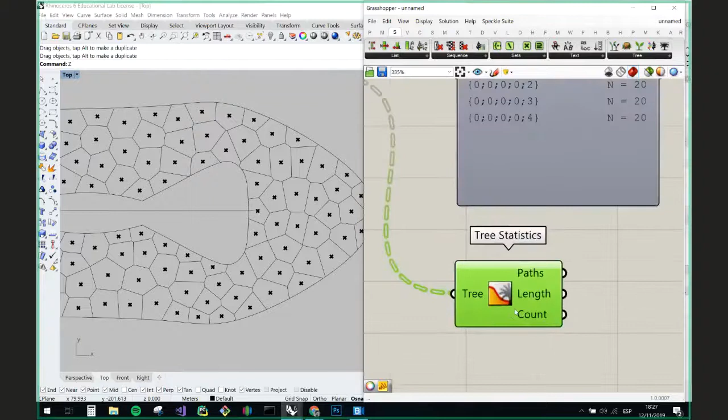I will go to set, tree, and tree statistics, and that will tell me I have 5. Tree statistics tells you the tree organization of the data set, and it's telling us we have these kinds of paths — these are the names of our paths, the first branch, the second, third, fourth, etc. And we have 5 branches in total.

Good, so now I will color them differently. I'll go to params, utility, params input, and use a color wheel, creating 5 different colors, and I want to color these different chunks according to this guide. So I will go to display, preview — these are my chunks, and these are the colors I want to work with.

I grafted and simplified, but this is something we need to see in another moment. Sorry, I will create first the boundary surface. And here we go.

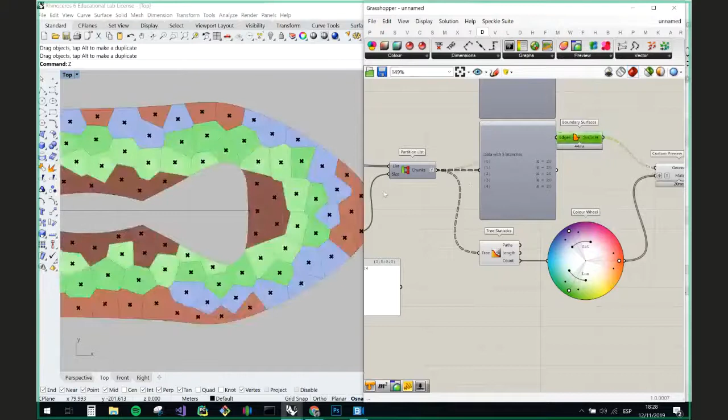Okay, and I will pick the last one. So in coding, when you want to pick the last one, you can type -1. And -1 gives you an error in this case. So we're going to type 4. And we have the 4 value here.

Imagine if you want only to subdivide this one, now I'm working only with this guy. If I want to apply another material, I type 3 and I'm working with this other guy. If you want to subdivide this in a different way, you can divide by 4, or by 2. Like 2, we have 3 chunks. By 1, now I have only 2 different materials.

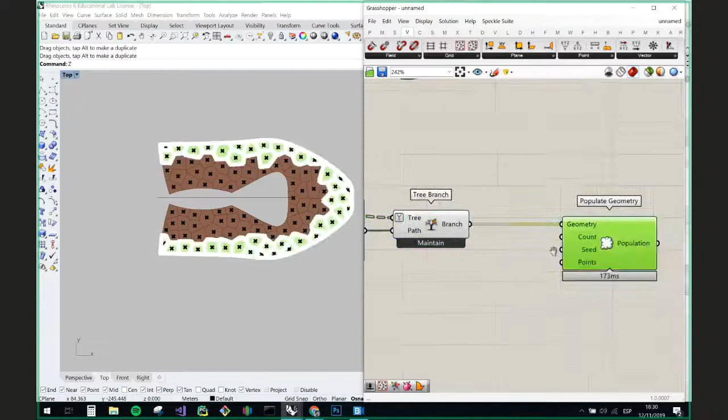So for instance, if I want to work only with the last one, here we go, I'm selecting it. And let's consider that I want to populate it again. I can go to vector, grid, populate geometry. Remember that this has to be converted into boundary surface.

Here, for instance, we are integrating more points that we want to cut. So let me only show you this part, and we'll turn off all the previous script. Now we are working only on this part, only on this portion. Maybe I also want to change the seed value, which is the algorithm, the random algorithm that controls the position of these points inside my geometry.

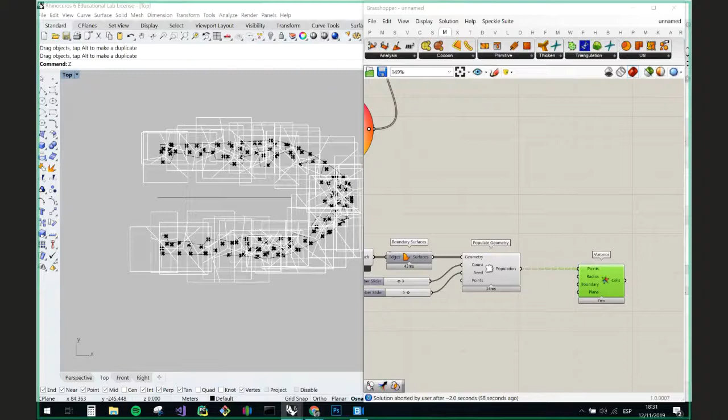Yeah, something like that, it's funny. I can just repeat what I did before. So I can create another tessellation, Voronoi, like I was doing before. And I can say that this Voronoi tessellation can be cut by intersection, like I did in the previous example. So these are my initial curves.

Sorry, these are the initial curves that I want to cut, and this is the geometry that I'm cutting. And here we go, you see? In this way, I'm just repeating the operation that I did before, but I'm increasing the subdivision that I can perform over this stuff here.

Is that clear? Yeah, I know that, see? I mean, I don't think it's very complex, but you need a little bit more practice to understand also why to work with data. And you can directly see the connection.

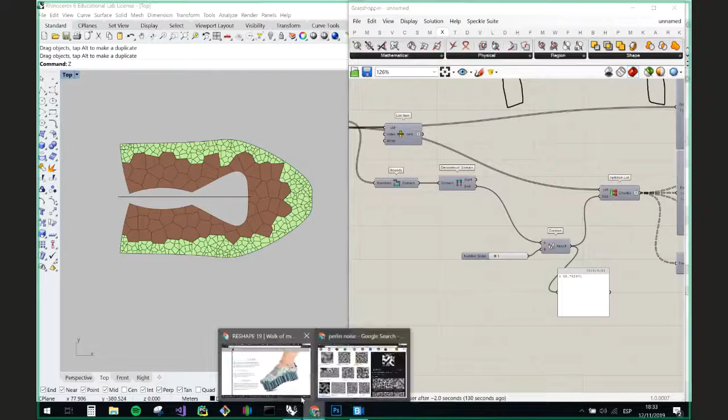All this stuff that I'm pretty sure sounded like Chinese to you is the third class of Grasshopper. Maybe after a couple of hours you'll grasp all this data structure. And only by using numbers and mathematics, you can control, you can increase the control that you have with forms, and look at the strict connection it has also with design. Like it or not, try to understand the implication it has with design applications.

Okay, good. So Nastasia, how are we in terms of time? Way over time. Okay, but I just want to - even if we are done, I will take only 5 minutes more to show you what Laura prepared, continue, because people can see from the recording afterwards, so no problem.

Okay, you can continue. I will just take maybe a little bit more time to show you a pattern that Laura prepared. I'll stop the sharing for one second because I would like to show you the physical prototype. Laura, can you bring me the physical prototype?

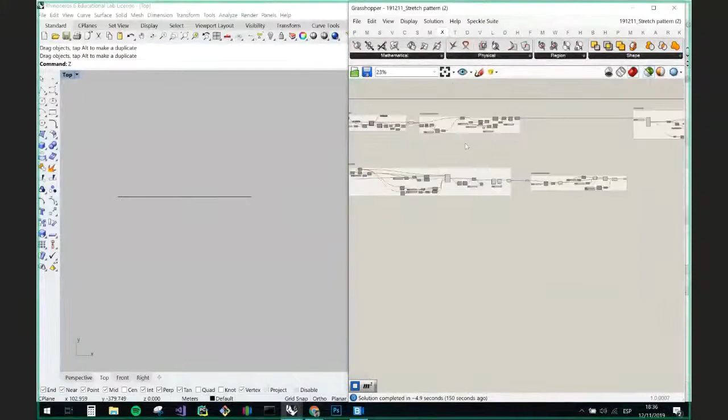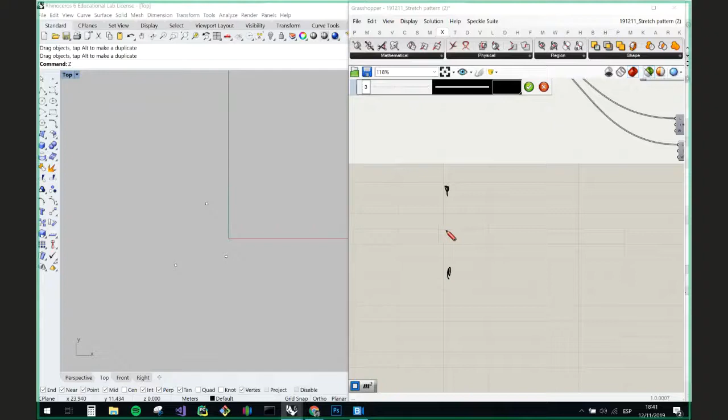Here you go. So just to repeat what I said: she's starting with one point, moving this point up. It's less mathematically based, but it's a good approach for a designer who wants to model a pattern with Grasshopper, closer to modeling than computational design. She creates one point, moves it vertically, subdivides this line, moves this point in the Y direction, then draws a curve between these points, copies this curve underneath, then mirrors this curve like this. And then what she's doing is creating an offset of this.

And what she does after is just move this offset down. So she has something like this that I'm drawing on the software, which is not easy. Is that clear? Let's see it in the code.

So we have our point. As I said before, we create a series of points. We move some of them in one direction, like the line that I said before that I want to draw. Then she's moving everything under, creating other control points. She's basically just creating the points that are needed in order to create this curve in a series of actions. She's repeating.

Sorting all these points according to the height, so the value in Z. Sorting these points according to the value in Y, creating a curve. So she's creating a curve.

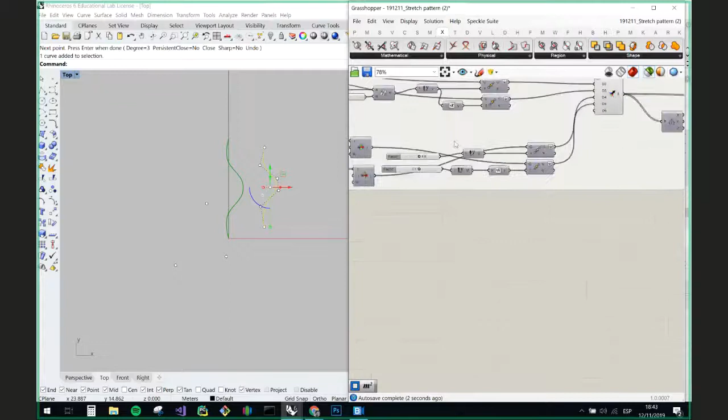No, it's parametric, that's why she's working like that. Okay, now I modify the parameter. Let's see if this works or not. Adriana, don't laugh because I see you laughing there.

Then she's subdividing this line, creating all this curve, and she's moving this curve on top, shifting them. Now I modify, okay, you see, I modify the parameters of before, so maybe I lost the final pattern that she wanted to make.

And she's not here, but in any case, she's creating this kind of pattern that can be 3D printed, kind of continuous. All these gaps that she's leaving are made on purpose, because she also knows that the thickness of the material that is printed is always allowing the two lines to interconnect, to be locked one with the other.

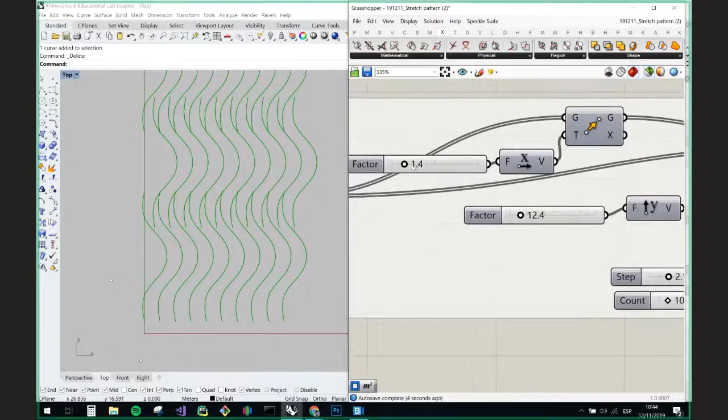But she has quite a lot of capacity to control how these things can be distributed in space. So it's just a couple of parameters that allow her to even play with the flexibility of the material, because it depends also on the way that it intersects with the initial geometry.

Okay, so at the end this is more, I guess, an example of parametric design - how these things interlock, how they are distributed, which is the degree of rotation that they have. It's not so complex, it's quite basic, but it's interesting and smart the way that she uses it to play with this line.

Let's have a look again from what you saw to the small pattern. You see, there is always the same line that's just moved. There are many approaches - this is the one that she made for the moment.

Adriana is trying to explain how the flexibility process works. But okay, that is one output of it.

Okay, so usually I have a course of 60, 70 hours of Grasshopper when I go over all the range of possibilities that it has. But you don't need it to start producing first iterations. I suggest you try to start with a bidimensional pattern.